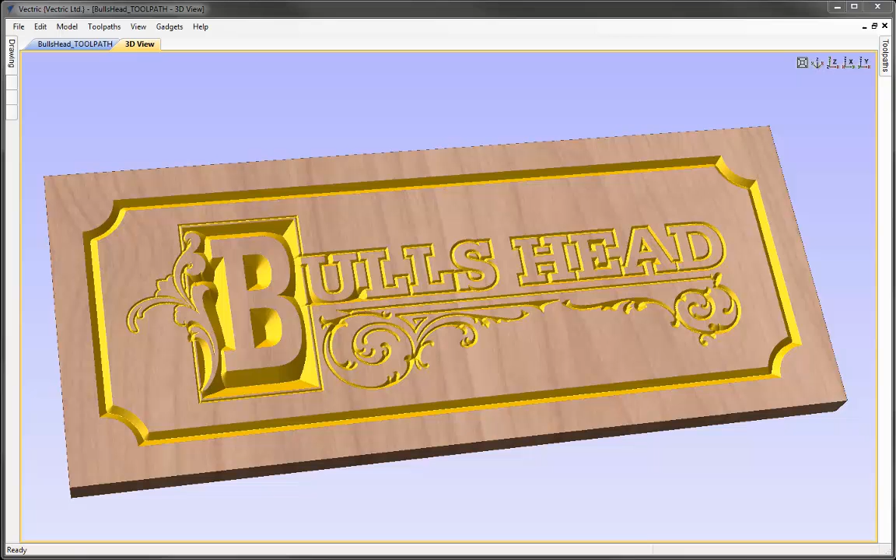Let's start by opening a new copy of the software, and we're going to come down and click on the icon to open an existing file. I'm going to select a vector file which has been designed in another program, bullshead.dxf, and hit open.

The software will automatically set the job size to be the size of the vectors, so I'm just going to increase that to 12 in X and 5 in Y, Z0 on the top of the block, half-inch material. I'm going to uncheck the option for use offset so that XY0 becomes the lower left corner, and then we can go ahead and hit OK.

Next, I want to select all the vectors, so I'm going to go up to Edit, Select All Vectors, click on the icon here to align these objects, and click on the middle one at the top here to align them in the center of our work area.

Now, with those vectors selected, it's as easy as clicking on the icon to switch to the Toolpaths tab, coming up to double check our material settings. So if I have a look here, these are all safe and appropriate. If you're planning to cut this yourself, you need to make sure that they're correct for your setup, and also the values you enter for the toolpath will be safe and appropriate too for your material, your tooling and your machine.

Here with the vectors selected though, I'm just going to click on the icon to V-carve these. Start depth is going to be 0 or the surface of the material. I'm going to select a 90-degree V-bit from the tool database, take all the other options as default, change the name here to something appropriate, and hit calculate.

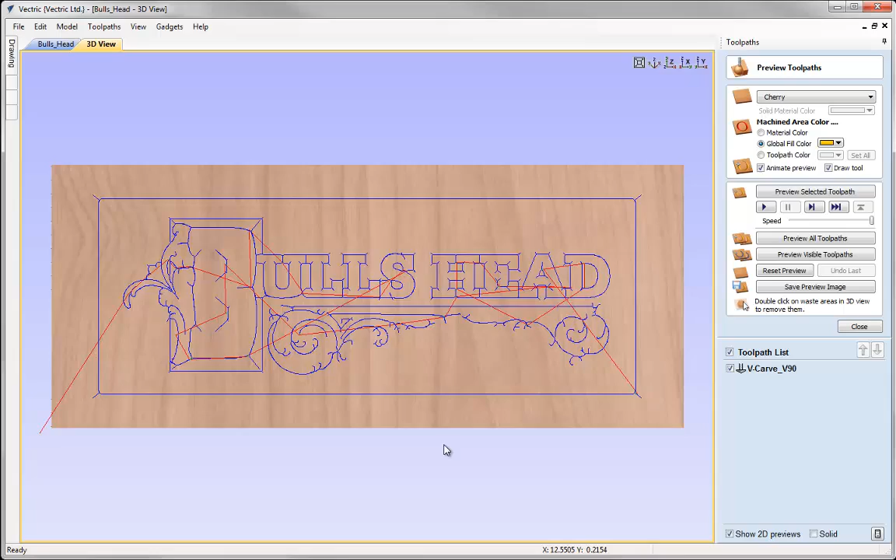Now we've automatically gone into the 3D view. I can see a drawing of the toolpath and the preview toolpaths form has opened here. I can pick the appropriate material and a color, then we can click on the icon to preview the selected toolpath, and there we can see the result of that toolpath.

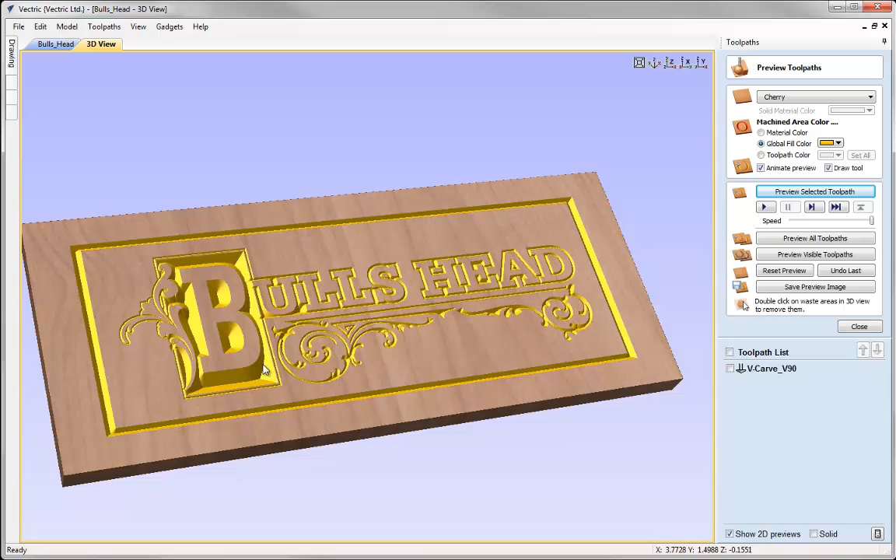So with the V-carving toolpath, what's going to happen is the tool depth is going to vary depending on the width of the vector and give us this very attractive carved look. The software figures that all out for us. It figures those depths out for us based on the selection of vectors we give it.

As long as the preview looks correct, I'm now ready to close this, click on the icon to save the toolpath. I'll choose the appropriate post-processor that is going to convert my toolpath into a format that my machine tool will understand.

So you'd pick your machine from the list here, or you'd pick the control software you use, click on the Save Toolpaths button, give that file a name and hit save, and now you'd have a file that you're ready to send over to your CNC, and once you've set up your material and your tooling as we have here in the software, you could go ahead and machine this sign.

So very, very fast to go from importing the vectors, positioning them in the job, calculating the toolpath, and then outputting them to a part that I can actually cut.

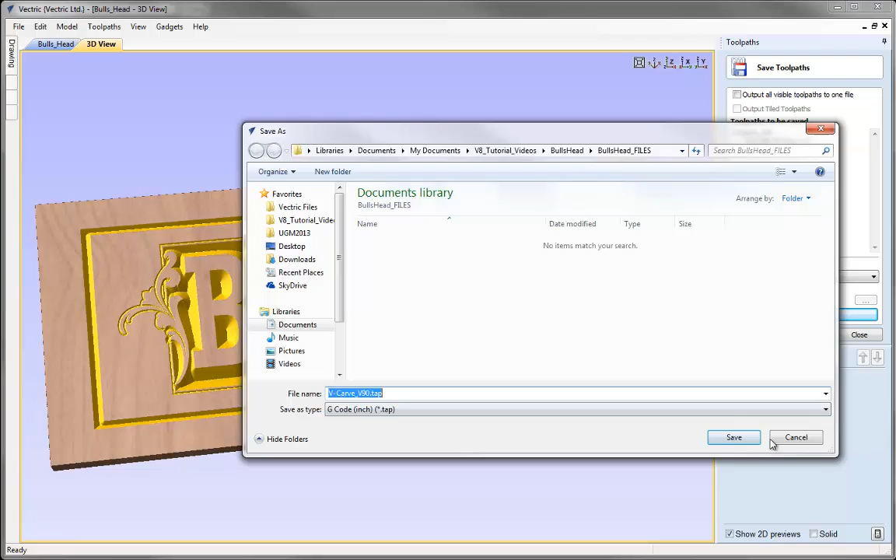I'm not going to save the toolpath here. We'll just go ahead and cancel that operation. What I would like to show you is the fact that it's also very quick and easy to make edits to the vectors too, so I can create different iterations. If we close the Save Toolpaths form there, click on the icon to switch back to the Drawing tab, and click on the tab at the top here to go back into the 2D view.

Now I'm going to click in the background to deselect the vectors. I'll click on this one and hit delete to get rid of it, then select the outer vector here and click on the icon to draw a rectangle. This will also let me edit a selected rectangle too.

With the anchor point set in the center, I'm going to tell the software I'd like to make this 11 by 4 inches, hit apply so we've resized it, and that I'd like to create internal radii on this of 1/2 inch, hit apply there to add a bit more decoration to our border.

I'm going to hit close now, and then to create the offset vector inside from that, I'm going to click on the icon here to offset, making sure this vector is still selected. I'll offset inwards by a distance of 0.2, create sharp corners, and hit the offset button. So there we have the other vector for our border.

Now I'd like to reposition and resize the bull's head vector a little bit, so I'm going to click in the bottom right here inside of the borders and drag up to make sure that I touch all the vectors within that selection. I'm going to click on this.

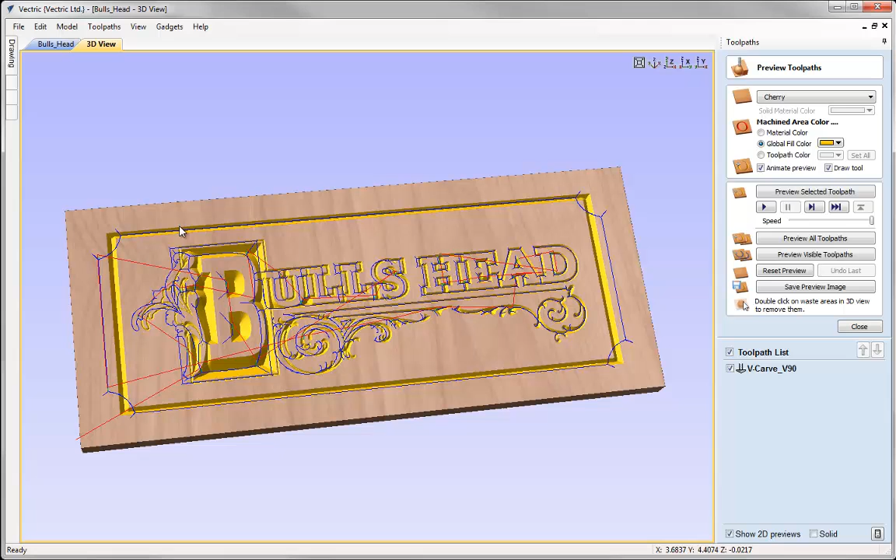Now we can see the preview from the last iteration of this, so I'm going to reset that. I'll preview the selected toolpath, and there we can see the new version of our design with the resized, moved vectors and the edited border.

Again, if I like the way that looks and I'm ready to cut it, we can hit close and hit the Save Toolpaths button there in order to output the toolpath for our CNC.

So it's very quick and easy for me to import the data, size and position it and machine it, but also very quick and easy for me to make edits to the design so that I can get it looking just the way I want.

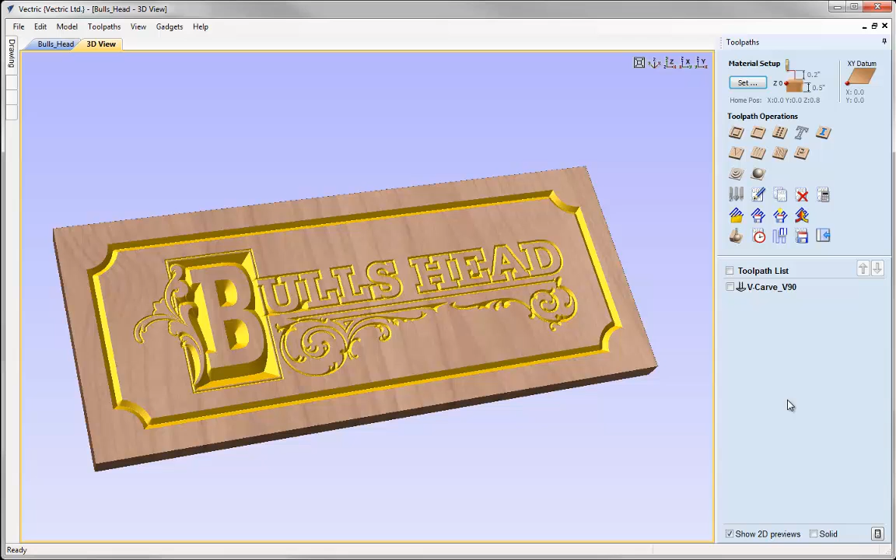Now, in addition to the preview being beneficial because it lets me see what I'm going to cut before I cut it, avoiding any problems because I can fix them beforehand, it also gives me this nice shaded view that I could save in order to send out to my customer.

If we go into the preview, click on the Save Preview Image, I could save a copy of the image that we can see in the 3D view there, email that to my customer and say this is the part I'm going to cut for you, and they can approve that, so I know that they're approving exactly what I'm going to machine.

So that concludes this very quick run through here. As I mentioned at the start, there's a longer version of this tutorial if you want to go into detail on this process and follow along.